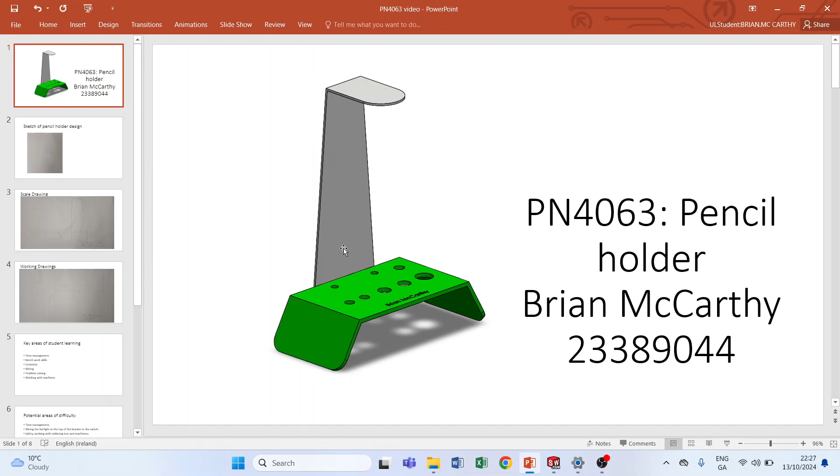So this is my project for PN4063, which is a pencil holder. Down here is going to be the base of the project, made of 3mm acrylic. And this is going to be the bracket that holds up the light. I'm going to have an LED light up here.

So down here, that's for two pens, and that's for a 4-colour biro. There, that's going to be a switch. Those two holes there, that's going to join the bracket to the base of the project. And there, I'm going to have my name on it. Well, the students will have their name on it, but I'm going to cut that out using a laser cutter.

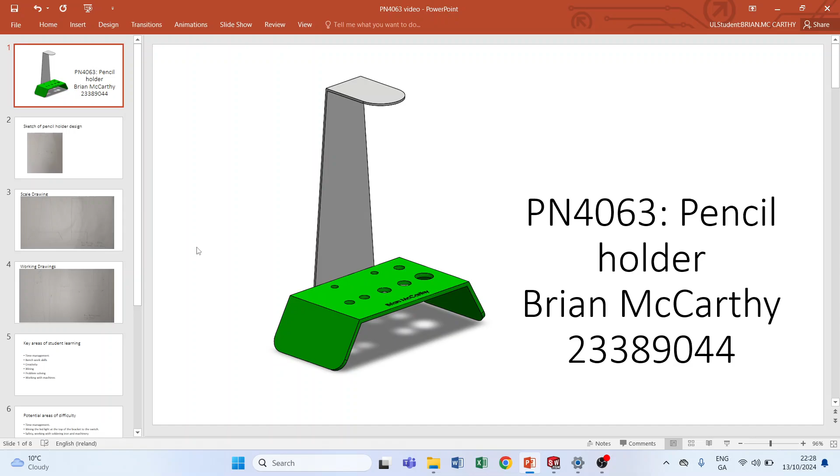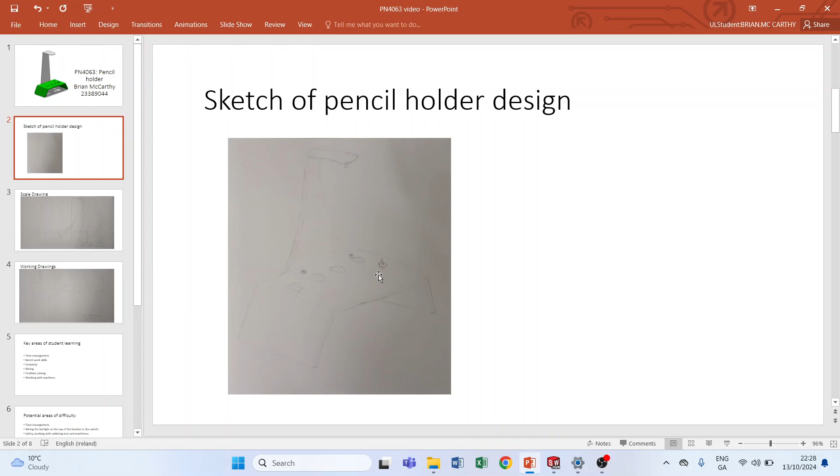Here's the sketch of the pencil holder. You can see here the design. It isn't really good quality, but you kind of get an idea of my plan of it. So that's the LED up there, and that's the switch, and that's the 4 holes.

This is a working drawing of the project. So that's going to be a 17.5mm radius on top there. That's going to be 225mm long, and that's going to be 190 long in total. And then the legs are going to be 40 each side, bent at 90 degrees. And that's 60mm, that width there of the bracket.

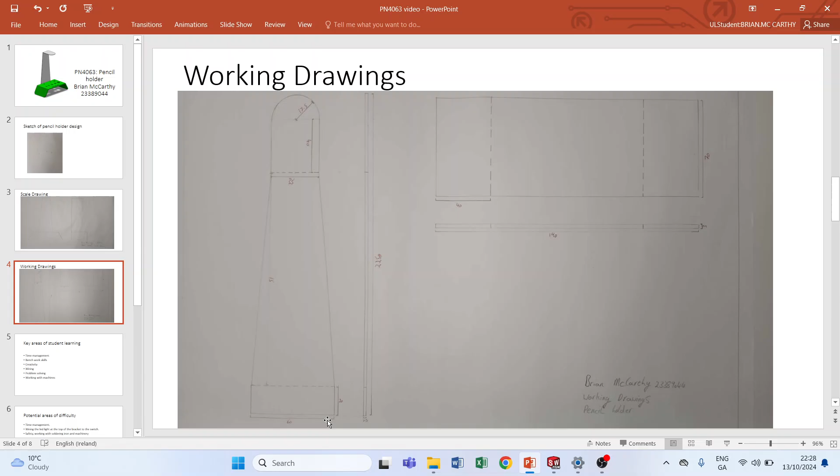So the key areas of learning for the students: time management, that's going to be important because they're just coming in and it's a taster session. Most of them won't have any prior knowledge of working with machinery in the workshop, working with acrylic and aluminium, so that's going to be an area they learn. Bench work - they're going to learn marking out, filing, sawing, skills like that. Creativity, they're going to learn that too.

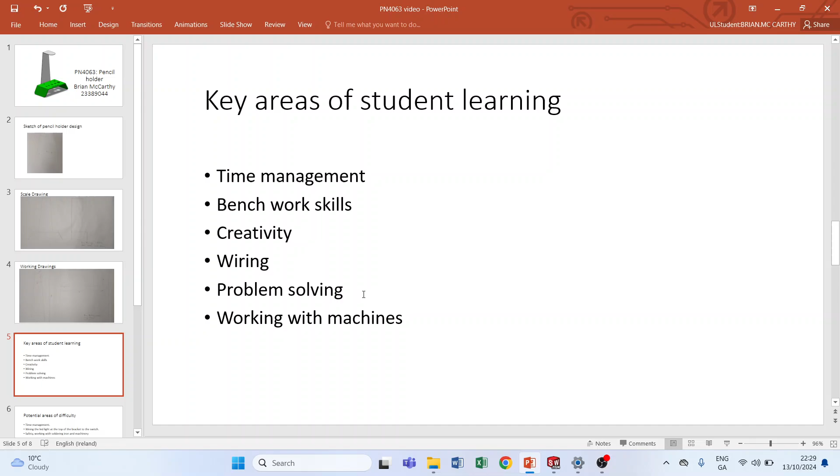Wiring - they're going to learn wiring there from the switch to the LED. Problem solving - they're going to come up with a lot of challenges they might not have faced before with this project. Working with machines as well, that's going to be important, because they're working with lathes and drills and soldering irons. Many students have not done that before.

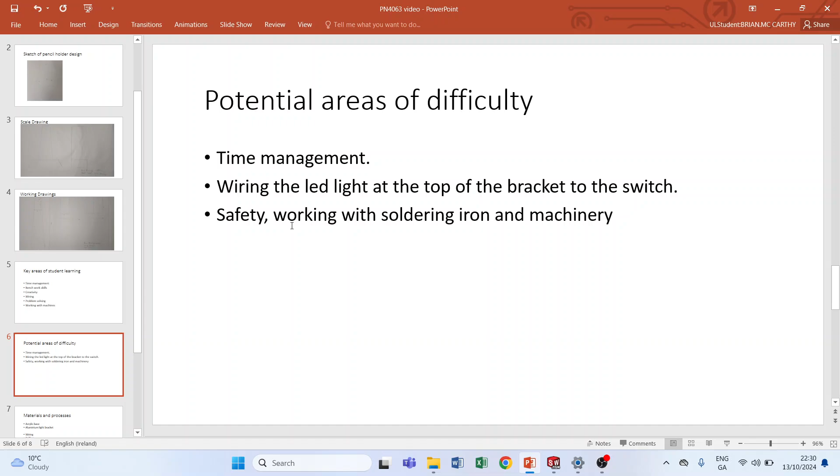So potential difficulty: time management, that's going to be a difficulty because students might have not learnt about machines before, such as the soldering iron and drilling, and it's going to be something new for them. Wiring the LED at the top of the brackets - many students haven't learned anything about wiring before, so it's their first time doing it. And safety - students haven't really worked with any machines such as the soldering iron and dangerous machinery like that, so they have to know the safety of it.

The materials I'm going to use: acrylic base, that's going to be 3mm, and aluminium light bracket, that's going to be 1.5mm aluminium. And the processes they're going to use are wiring, drilling, filing, marking out, sawing, bending, and bending acrylic.

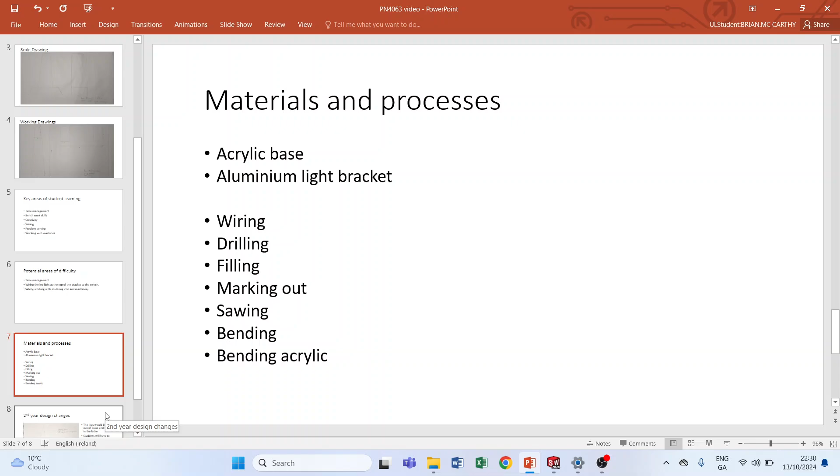So this is the second year design changes I would make to the project. There's going to be brass legs down the bottom, so students can learn how to work the lathe, because in first year you wouldn't really trust them with the lathe, but in second year you'd let them into that. And then for the bracket and for the light, I'd get them to make that themselves, so they have to design it to requirements such as material and dimensions. They can make it out of brass, aluminium, or acrylic, whatever they want, as long as it fits within certain dimensions that I'm going to make.

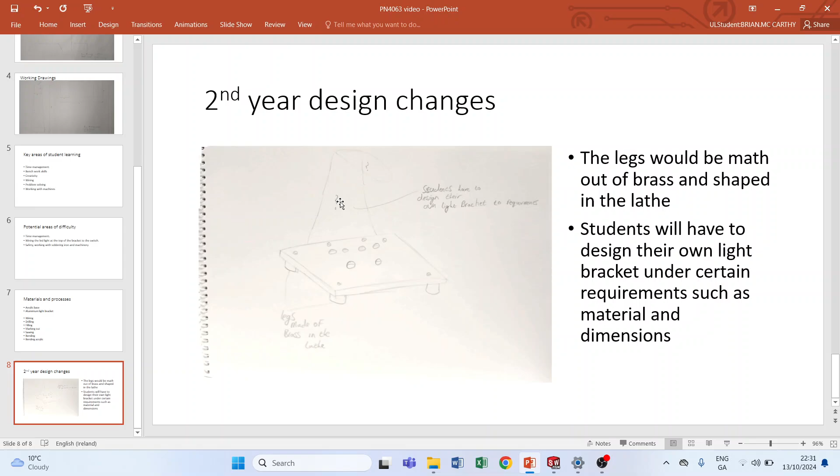So in here now, this is the project itself. As you can see, I'll show you different views of it. So that's the side view of it now, and they're going to be a 10mm radius there. It's a good enough project there, I'm very happy with the design. So that's it there now, all put together.

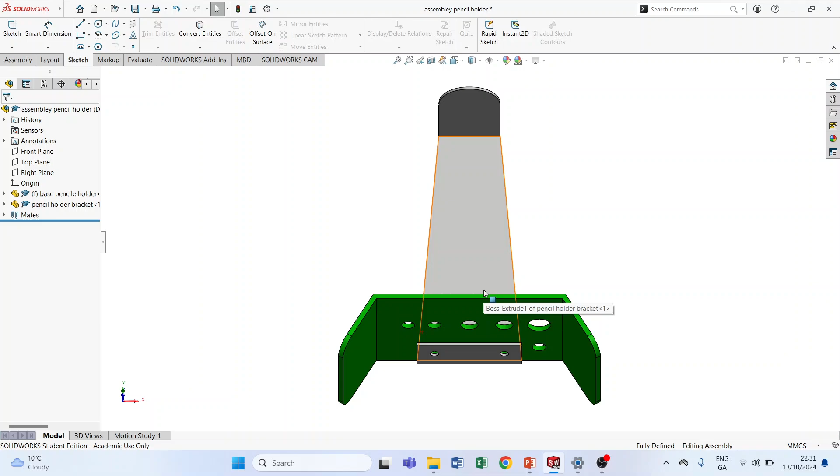There you go, there's the holes underneath there. And that's on top of it then. And you can see the name, my name written there - that's going to be cut out with a laser cutter. So that's the back of the project then. Yeah, so that's it then.